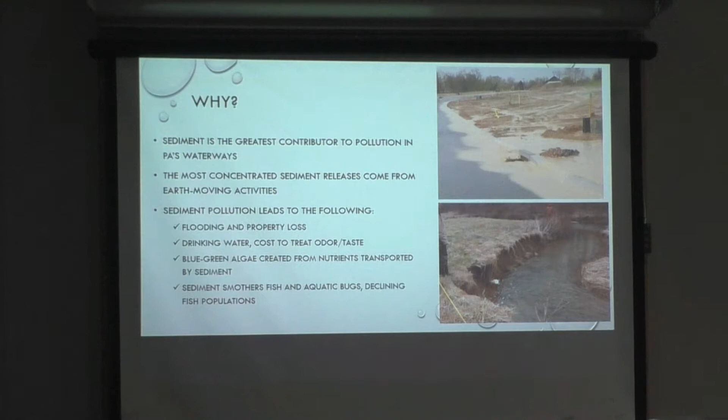It also plays a role in cost in treating our drinking water. Blue-green algae is created from nutrients transported by sediment. So you've probably seen on the news lakes or ponds that have real bad algae growth. That's not good, because if you go in and swim in there, you could get sick. And then ultimately, sediment will smother fish and aquatic bugs, and it declines our fish population. So that is the reason why.

So a brief description of our delegation under Chapter 102 stems from the Federal Clean Water Act. And that's under Section 402. It prohibits anybody from discharging any pollutant, which could be industrial, municipal, stormwater, through a point source into waters of the U.S. unless they have been authorized an NPDES permit. So the NPDES permit is a federal permit underneath the Clean Water Act.

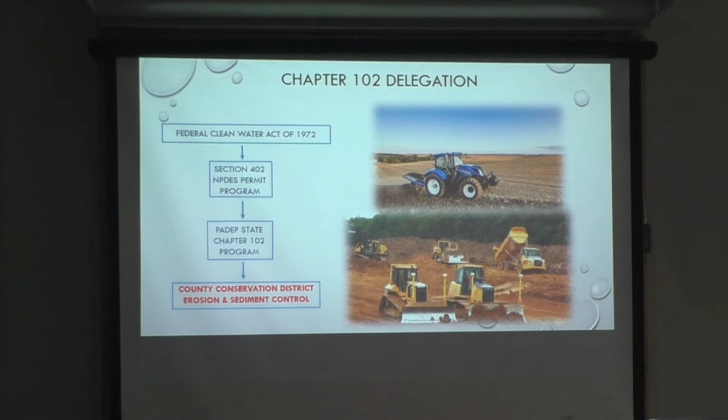The federal Clean Water Act, they then delegate that to all of the states, and the states delegate that again down to the conservation districts. And basically our Chapter 102 is underneath that permit, which is basically a guideline on how to implement the Clean Water Act. So that's how we are involved. So what does that mean? Earth disturbance activities. That's Chapter 102.

So earth disturbance activities can be defined as land clearing, grubbing, grading, excavation, construction of an embankment, land development, ag plowing or tilling, animal heavy use areas, timber harvesting, road maintenance, oil and gas well drilling, mineral extraction. So any of those activities, if you're doing 5,000 square feet or more of earth disturbance activities, you're required to have a written erosion and sediment pollution control plan.

Now somebody had the question of, well, what happens if it's less than 5,000 square feet? If it's less than 5,000 square feet, you should still be implementing E&S controls, which are basically, we'll get into that later, controls that minimize muddy water from leaving your earth disturbance activity site, so that it's not going into a waterway or into a storm drain, because storm drains lead to a stream eventually. So roughly 5,000 square feet is about the size of a basketball court.

What about just generalized farming, you know, like just plowing the fields like it's been done forever? I'll get into that in a couple of minutes. Yeah, this is just a general overview. So ag plowing and tilling is also considered an earth disturbance activity, but they have different criteria than your residential or commercial.

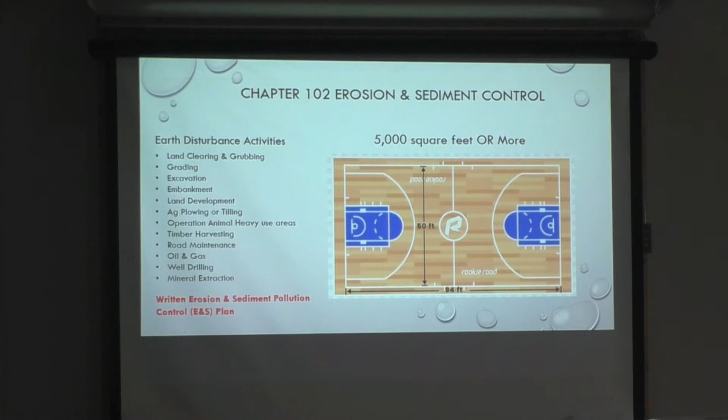Okay, so then once we get to 1 acre of earth disturbance, now you are bumped into the National Pollutant Discharge Elimination System, which we abbreviate as the NPDES Permit, that is underneath the Federal Clean Water Act. So anything 1 acre or more, which is roughly the size of a football field minus your end zones, you are required to get an NPDES permit. And that authorizes the discharge of stormwater into waters of the Commonwealth related to earth disturbance activities. Make sense?

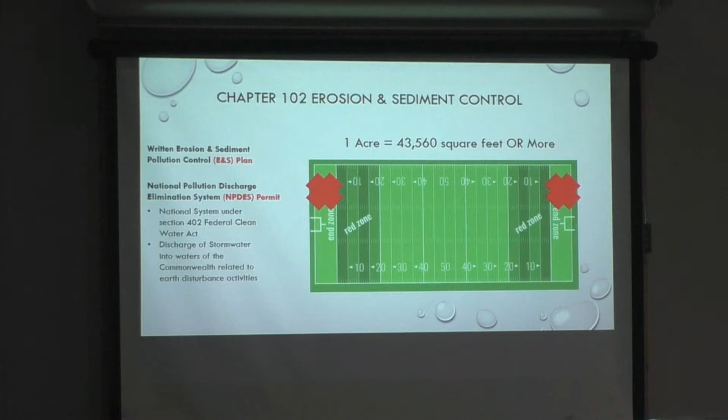So we also are going to be talking a lot about this best management practice that we will refer to as BMP. And what that is, they are activities, facilities, measures, planning or procedures that minimize accelerated erosion and sediment, manage stormwater, and they protect, maintain, reclaim, and restore the quality of waters before, during, and after earth disturbance activities. So when we refer to BMPs, it could be a structure, it could be an activity, it could be a measure or a construction sequence. We refer to those as BMPs.

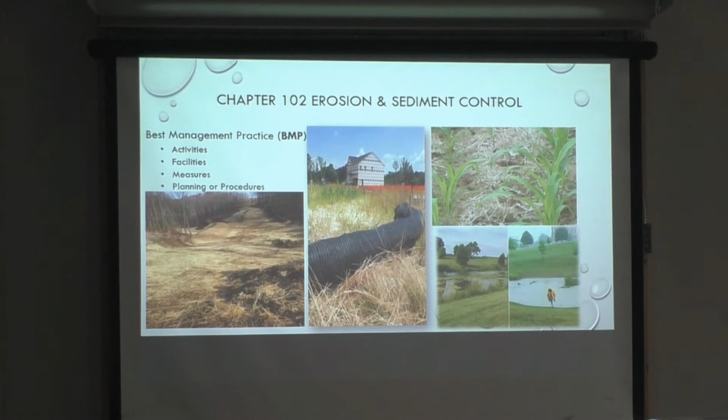So general overview of why we're here talking about Chapter 102, Erosion and Sediment Control, is erosion is a natural process. And when we put in human activities, we alter that natural process and it increases the rate of erosion. So basically, accelerated erosion by human activities, that is what we're regulating under the state's Department of Environmental Protection Chapter 102 program. So the goal for Chapter 102 is to minimize the accelerated erosion and the resulting sedimentation.

Jeff? So let's say I have erosion on a stream on my property and it's starting to wash out a tree. Do I contact the district if nothing man-made has occurred in that stream? Well, as far as Chapter 102, that's more like 105 stuff. So Chapter 105, if you want to go in and fix the stream bank and put in some sort of wall or gabion basket or riprap, then you would need to contact the district to figure out what type of permits or waivers under Chapter 105.

Okay, so Chapter 102 is earth disturbance activities, but it does not include in-stream or in-wetland construction. We're going to get to that in Chapter 105, which is after Chapter 102.

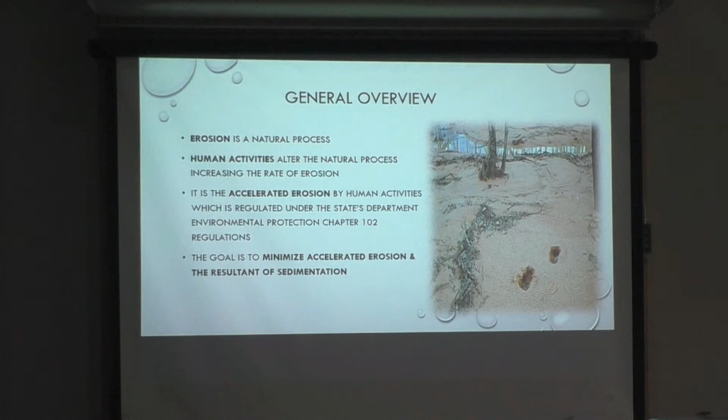I'm still kind of under the overview here, but we're going to get to Rich, who's going to speak about Ag 102. Okay, I'm going to talk today. Can you press the button for me, please?

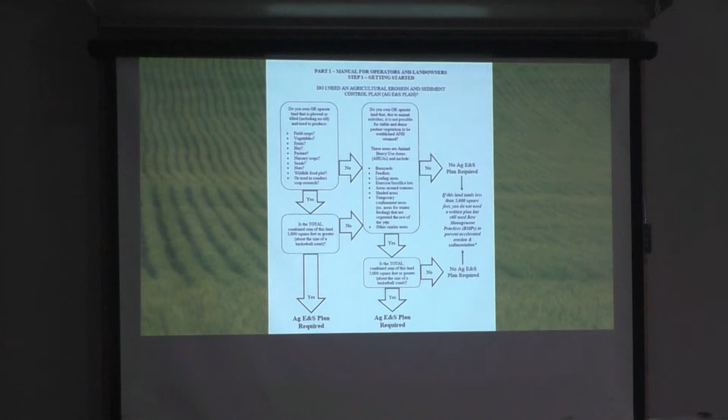So who needs an agriculture erosion and sedimentation plan? Obviously, if you've got 50 acres of corn and wheat and hay, you probably do. Hit the next button. So this is how the state defines it. And they've got a whole flow chart, but let's keep it simple. If you plow or till, including no-till, more than 5,000 square feet in total, or if you have an animal heavy use area that's 5,000 square feet or more, then you need a plan, a written plan.

So, all farms that till more than 5,000 square feet or have an animal heavy use area, that's your muddy barnyard area, more than 5,000 square feet must have an agriculture erosion and sedimentation control plan. They do not have to be submitted to the district or to the state, but they must be kept on the farm and available upon request.

So if there's a complaint, somebody's complaining about your farm, I'm usually the first guy that comes out. First question I ask is, show me your paperwork. If you got your paperwork, you're 98% of the way there. Next slide, please. So, what must be included in an agriculture erosion and sedimentation plan? Next button. Okay. It must identify the farm and all the tracts of the farm.

It has to have best management practices on cropland, hayland, pasture, used to limit soil loss to T, the tolerable soil loss. And the federal government determines what the tolerable soil loss is for each soil type. That's the U.S. Department of Agriculture does that. So you also have to have conservation best management practices to minimize erosion in fields with less than 25% plant or residue cover and within 100 feet of a stream. So soybean fields that are harvested often do not have 25% cover going through the winter.

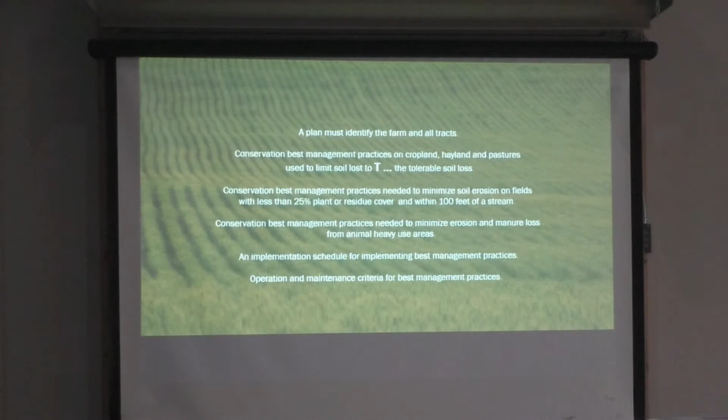So you have to have best management practices to minimize erosion and manure loss from any of your animal heavy use areas. And you have to have an implementation schedule for implementing these practices. And it has to be in your plan how you're going to maintain that over time. Next slide, please. So you have to have maps with your plan that show streams, lakes, and rivers, field and property boundaries, your animal heavy use areas, roads, and where your best management practices are going to be. Next slide, please.

A current, and I repeat, current NRCS, that's the Natural Resources Conservation Service, U.S. Department of Agriculture, conservation plan probably meets your agriculture erosion and sedimentation plan requirements. So if you work with NRCS, you're probably covered already. If not, you can write your own plan by going to the PA OneStop, which is a Penn State University website. And they also have a new, it's only a year old or so, Soil Erosion and Sedimentation Control Manual.

The Conservation District can help you write a plan. Give me a call. I come out, I help farmers all the time. I help you write a plan. Doesn't cost you anything, keeps you legal. Next slide, please. Here's just an example of the PA OneStop website. If you go to that website, which is through Penn State Cooperative Extension, it's real easy to draw a map of your farm. Although a sketch map, hand-drawn, does meet the technical requirements. Next slide. Here's just an example of how you can draw fields in your farm. Next slide, please.

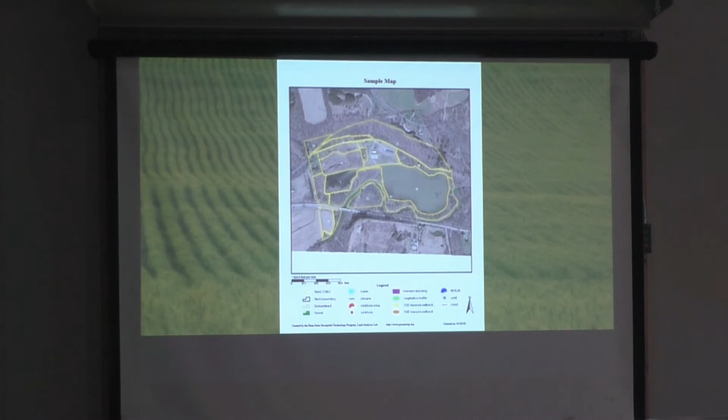Okay, so agricultural erosion and sedimentation control plan, if I ever come out to a farm after there's been a complaint, I look at their plan and I have a whole list of things that I look for to make sure their plan meets the requirements. That's a whole lot, but it's really not that complicated. I sit down at the kitchen table with the farmer for an hour, hour and a half, and we can get his plan on paper that'll meet his requirements. 95% of the time, there's no change in his operation. It's just a matter of having the paperwork you need.

Occasionally, you know, we have to work with the farmer to fix something, but most of the time in this county, most of the farmers are pretty much doing things okay according to the rules. They just don't have the paperwork. That's what I get people on all the time, because they don't know that they need to have the paperwork because they just haven't worried about it.

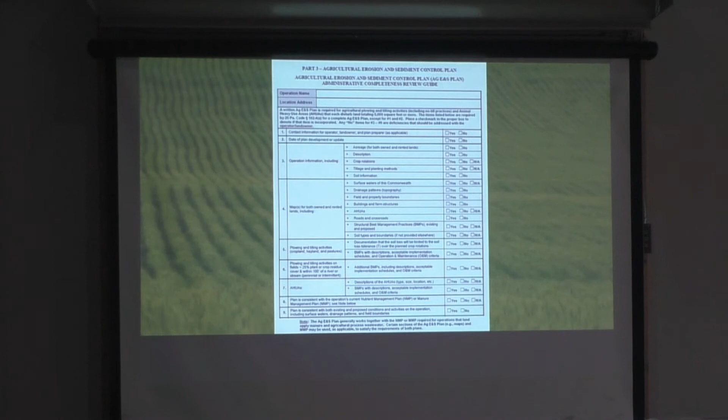Next slide, please. So, an NPDES permit, as these ladies have talked about. So if you're building a new barn and you're disturbing more than an acre, or you're building giant roads on your property or something like that on your farm, and you're disturbing more than an acre, then you fall into some of these other permits that the ladies are talking about, the NPDES permit. It's as if you're building townhouses, is the same as a barn if you're gonna do that kind of construction. Next slide, please.

Okay, and I would be remiss if I didn't touch on something else, because I also handle the manure and nutrient management program for the state. It's not part of 102, it's a separate box, it's a separate set of rules. But I wanted to mention it because erosion and sedimentation and manure management go hand in hand. They work together.

So I just want to mention real quick who needs a nutrient management plan or a manure management plan. So all farms that land apply manure must develop and implement a manure management plan. If you have more than 2 animal units per acre of cropland, hayland, and pastureland, then you need a higher level nutrient management plan. And an animal unit is 1,000 pounds.

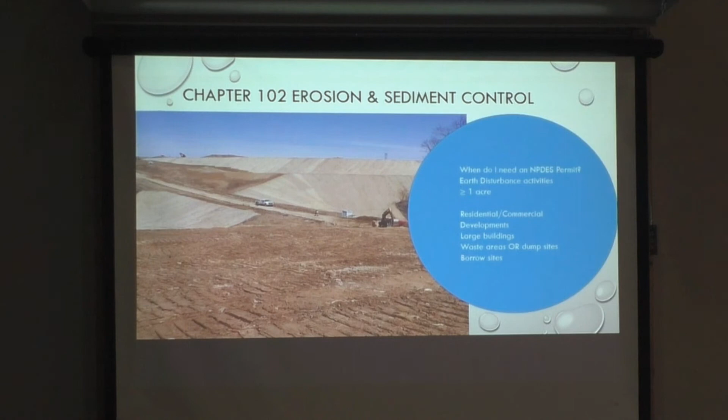So for an NPDES permit, it could be residential, commercial, large buildings, waste sites, borrow sites, timber harvest, road maintenance. Any of that, you're required to get an NPDES permit, and like I said, that is associated with a stormwater plan. And then if we go into more detail of the NPDES permit, you have two types: an individual permit and a general permit.

So just briefly, the individual permit is a more specified permit that has specified permit conditions. And what bumps you into that is the permit has 16 eligibility criteria. If you fall within those 16 items, which I'll name a few that are most common, which is your stream designation classification under Chapter 93, and that program basically rates the streams in our communities based on supporting fish, bugs, and water quality.

So the different types of stream designations that you can have are warm water fishery streams, cold water fishery streams, trout stock fishery streams, and then what bumps you into an individual permit is the high quality and the exceptional value water streams. So if you have a stream running through your property and you're going to develop it over 1 acre, it's going to be bumped into an individual permit.

So for Beaver County, what's one of the streams that are high quality? I want to say Dilworth Run. Most of them are northern. Little Beaver, Service Creek, there's only like three. There's one more. Part of Traverse coming out of Raccoon Creek State Park. There you go. Okay.

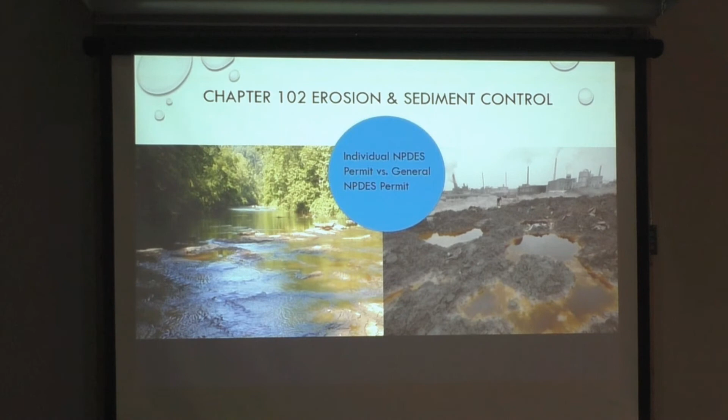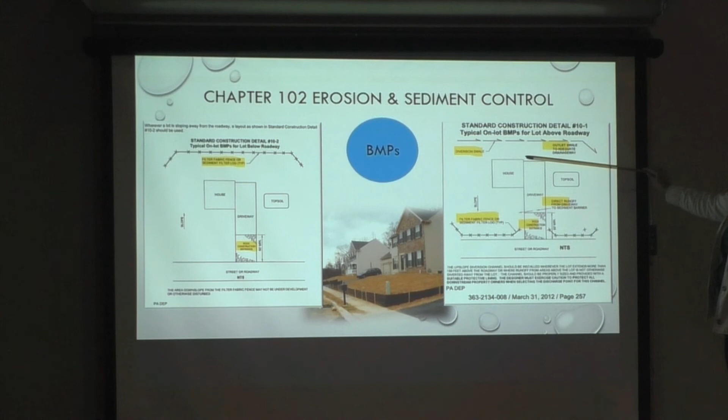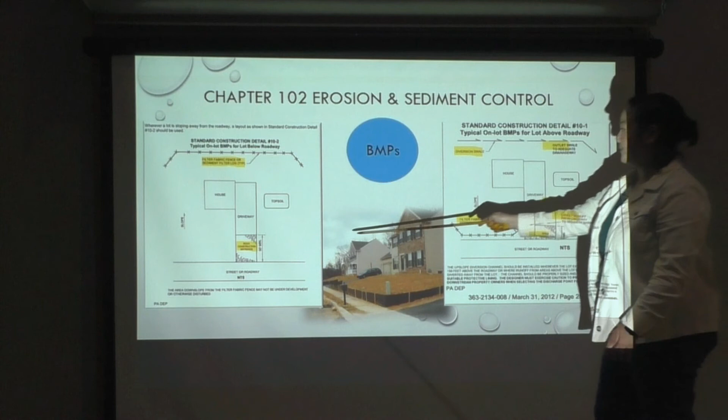But that helps with keeping the property dry, and this portion here is being protected by the silt fence, and then your rock construction entrance. So those are examples. This one over here is sloped to the back of the property, so you need silt fence to the back of your property because that's where your water is going to flow during a storm event. Does that all make sense?

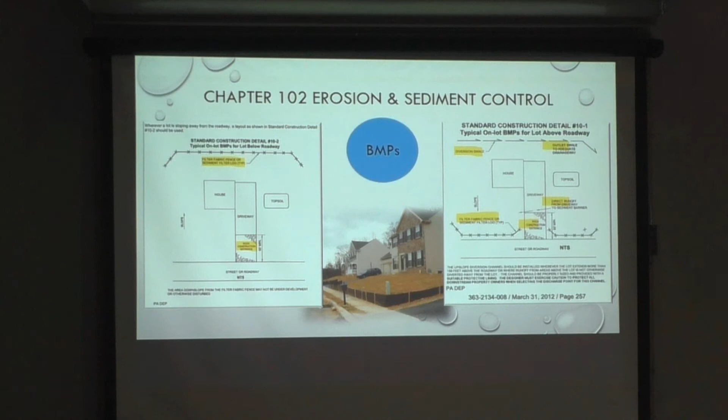Okay, so we had this ABACT BMP that we were talking about for individual permits, and they're more beefed up BMPs. So recently DEP, it used to be for high quality, exceptional value watersheds where you would have to use ABACT controls. They recently changed that to include impaired streams. So if your watershed is impaired to, say, siltation or nutrients, then you are supposed to be using ABACT controls.

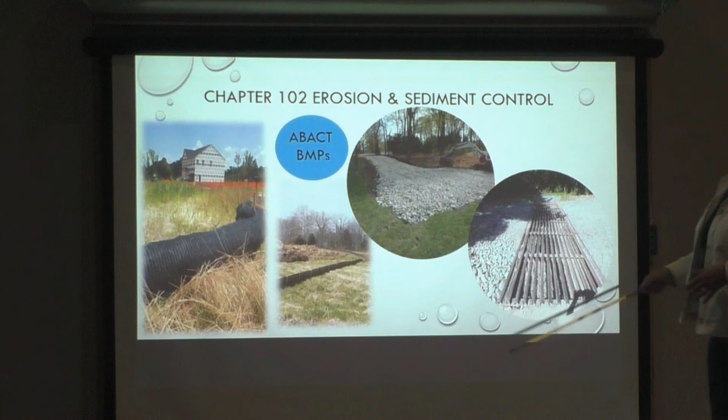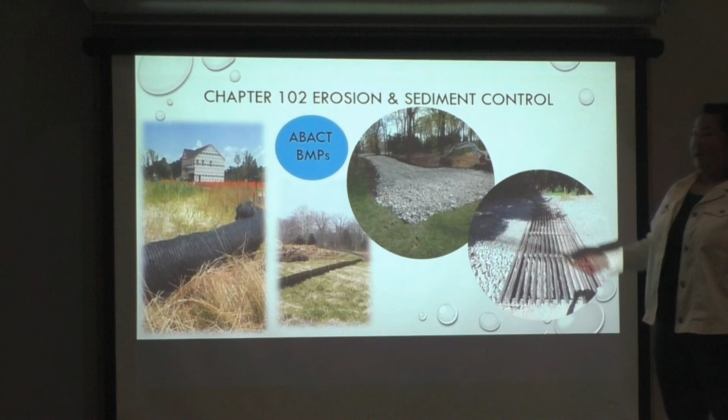And so here's the difference between ABACT and a regular BMP. So this is a rock construction entrance. This is what you would put in from the existing paved roadway back to your construction activity. And it's just basically like a 150-foot long rock entrance. That's a regular rock construction entrance. This is an ABACT to your regular rock construction entrance.

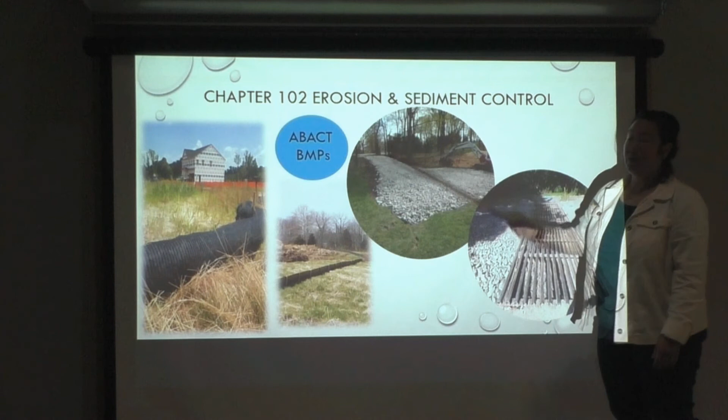That's a wash rack. So you put the wash rack in. You can't really tell here, but your road is up here. You would put the wash rack in probably about 25, maybe 15 feet from your pavement that you're going to get off of. And you basically have some sort of water source to clean off your tires before you leave. So the wash rack is there as a beefed up control.

Silt fence down here. So like I said, this is a perimeter control. Runs along the downslope side of your project. Silt fence is not an ABACT BMP. The ABACT BMP to silt fence is the compost sock. Have you seen that compost sock before? People are using that more because it's easier to install. So that compost sock is an ABACT control. What's that called again? Compost filter sock? Yeah. I've seen them, I didn't know what the name was. Yeah, compost filter sock, silt sock.

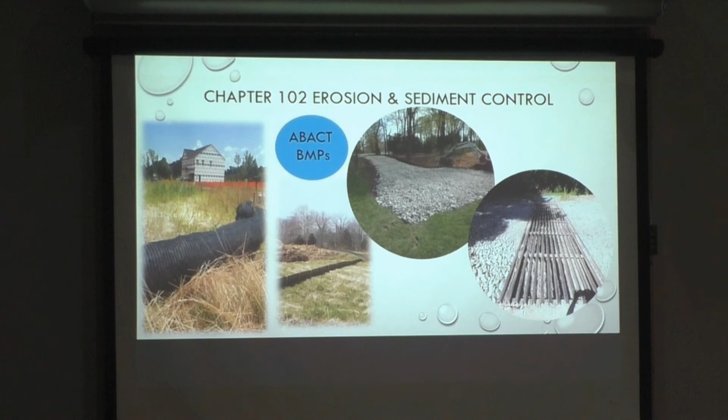So we call this post-construction stormwater management best management practice, which is PCSM BMP, and we put them into place due to the increase in impervious surfaces, like I said, and the interruption of the natural hydrologic cycle of gradual percolation of water through vegetation and soil. So we can use permanent structures or non-structural facilities to manage the volume, rate, and water quality during stormwater events. So underneath the state, requirements are only for water quality, rate, and volume. That's all that the state is required to look at.

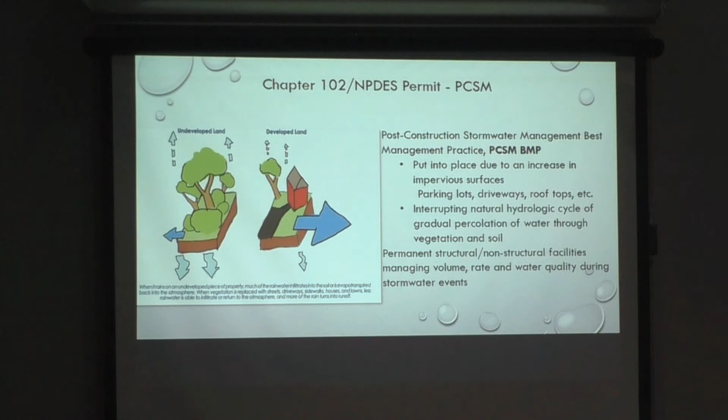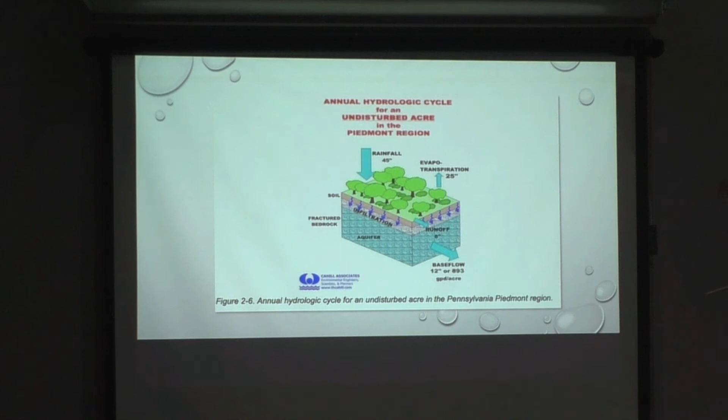So going back to this hydrologic cycle of an undisturbed acre or area, most of your rainfall is being taken back up into the sky. And then you have some of it infiltrating back into the ground and recharging your aquifer, and you have very little that's runoff. So that is your natural hydrologic cycle of how water goes through. And so the state wants to mimic that natural cycle. So a long time ago, everybody would install what? Big ponds, big structures, hole at the bottom of the pond, so when it rains, water goes in, water goes out. No storage. Now it's more strict. They have to create something natural so that most of your water is being infiltrated into the ground or going up into the sky.

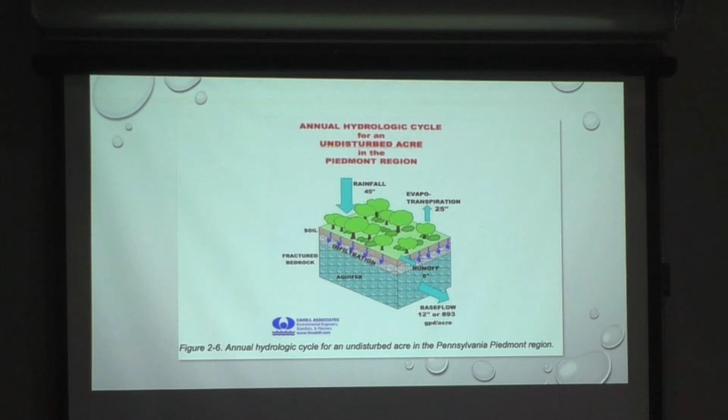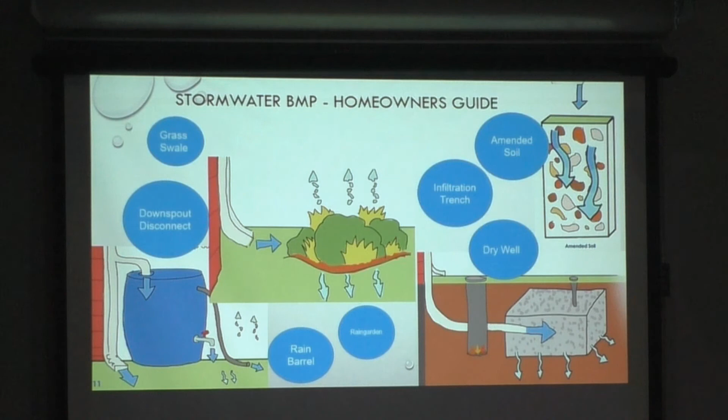I think that rain barrel workshop was like a week or so ago? Okay, and typically we pass out 20 rain barrel kits. Next year we are looking to up it, so if anyone's interested, please just let us know, so we can amend the grant annually.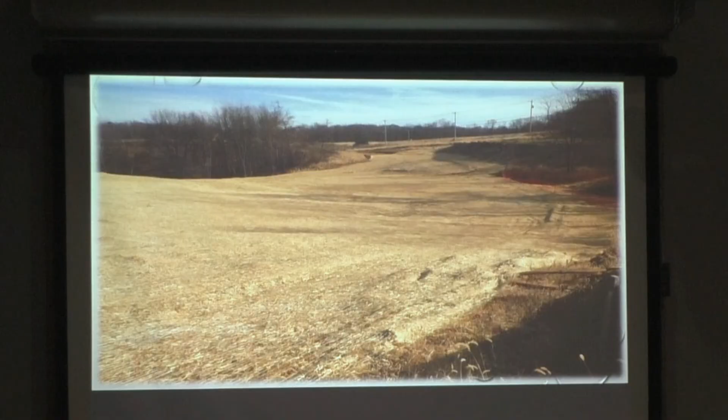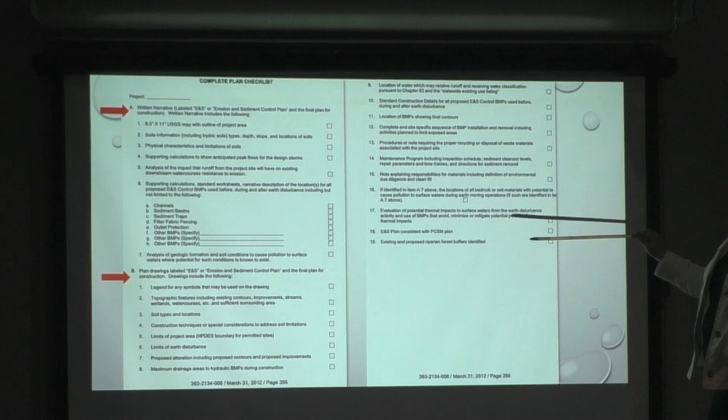Okay, so I apologize, you can't see this checklist, but this is out of the manual on page 356, and this is a checklist on what kind of information materials you need for an erosion and sediment plan. So number 1 is a narrative, which is going to be a report, and the second item is going to be a plan drawing. And as part of chapter 102, the E&S plan should be prepared by a person trained and experienced in E&S control methods and techniques.

And so this checklist in that manual, like I said, the manual is going to be your handy dandy guide. The checklist is going to help you on what you need for that E&S plan. And like I said, anything 5,000 square feet to less than an acre, you're not obligated to send it into the district for review unless the municipality requires it.

What if a neighbor would complain? So we do get complaints, and we are delegated to go out to do complaints. If we go out to do a complaint, we are obligated to ask for an E&S plan. And if there is no E&S plan on site, then we would ask them to write one and submit it to us, and there is a review fee that we then have to charge them. So it's best for them to have it done in the first place? Yes.

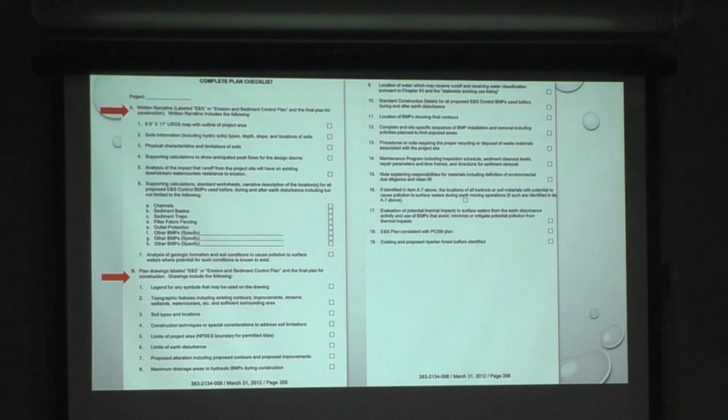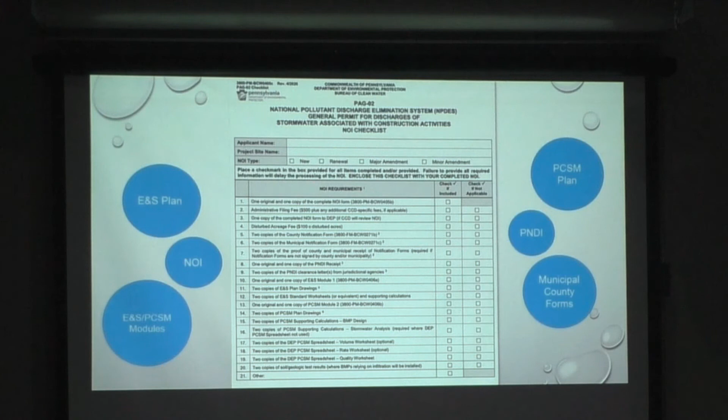And there is a PNDI. I'll just go over that briefly now because we'll go over it again under chapter 105, but that's basically a tool under the Pennsylvania Natural Heritage Program to depict threatened, endangered and special concern species in the area where you're going to be doing disturbance. Okay, that's chapter 102. Any questions?